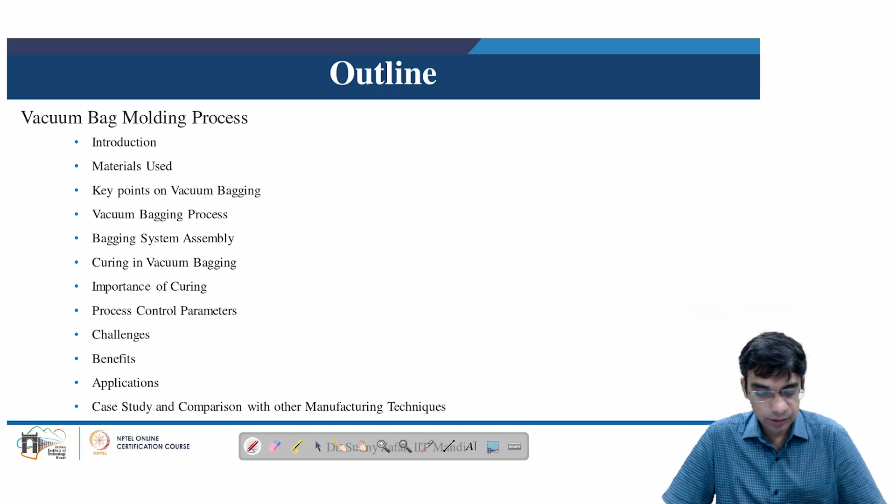Vacuum bagging molding is an open molding process to manufacture the wind turbine blade. We have seen other open molding processes which were the hand layup and spray layup process. The vacuum bag molding process, sometimes also known as the vacuum bagging process, is a process in which the resin - here we are talking specifically of resin meaning thermosets, especially epoxy -

in which the resin to fiber wetting is assisted using vacuum. So the main purpose of the vacuum process is it removes the air which is trapped inside the laminate, thus reducing the defects and improving the strength of the laminate.

Various advantages of the vacuum bag molding method include improvement in strength of the laminates by reducing defects, because by using vacuum there is a very good consolidation of various plies in the laminate. The vacuum bagging process is also low cost compared to other methods such as compression molded laminates, and the density of the laminate in this case is much better compared to compression molded laminates.

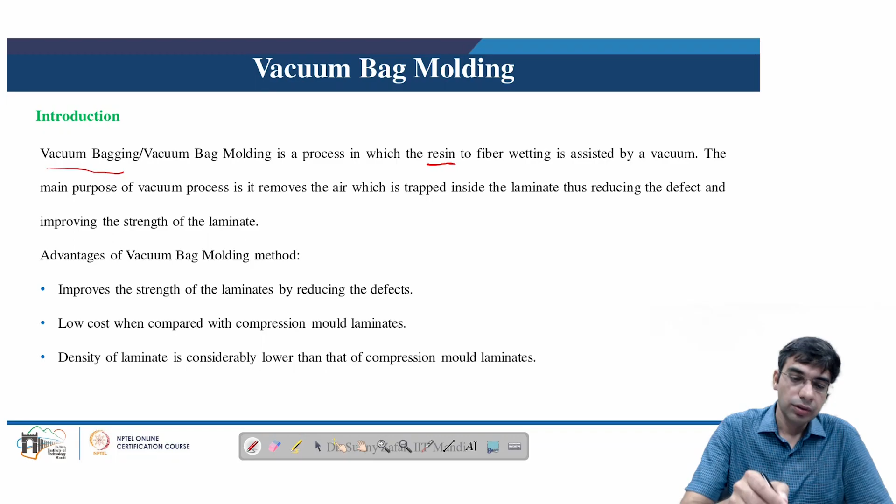The various materials which are used in vacuum bagging for manufacturing the wind turbine blade include various fibers like carbon fiber and glass fiber, resins like epoxy and polyester, and some auxiliary materials are also used in the process of vacuum bagging, which include release agents, peel ply, and bleeder cloth.

We will see some of the key points in the vacuum bagging process. First is the debulking process. If a composite part has few plies, say up to 4, debulking can occur as vacuum is applied during curing. For more number of plies, debulking occurs after every 4 to 6 layers. This repeated vacuuming helps to eliminate trapped air and volatiles, reducing void content and improving the part's structural integrity.

Second point is vacuum application during cure. Applying vacuum during curing not only consolidates the layers but also removes volatiles like residual solvents or absorbed gases. This ensures a lower void content, which is crucial because even a small percentage of voids can significantly weaken the composite.

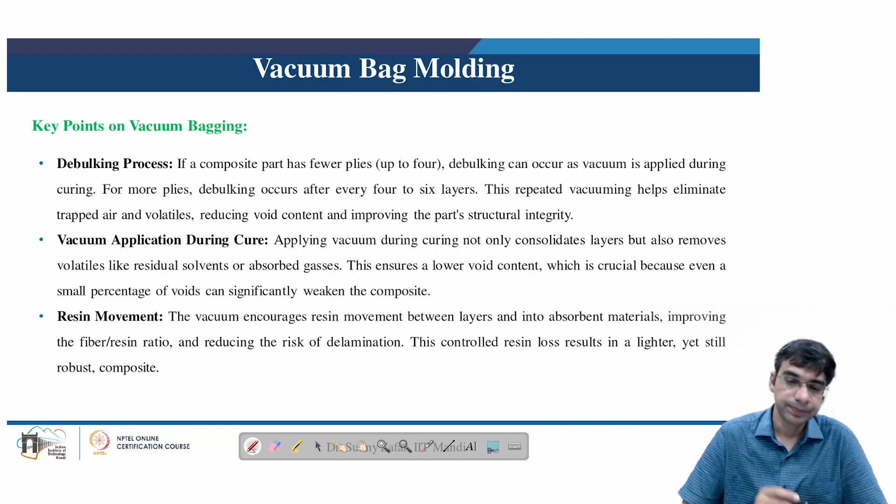We will now understand the steps followed in the vacuum bagging process. Essentially there are 4 steps, of which the first is preparation of materials - this means layup of the fiber reinforcement layer and resin application. As we have seen in structural composites used in wind turbine blades, the composite may consist of several layers of fibers stacked together. This stacking up of layers in various configurations is known as layup.

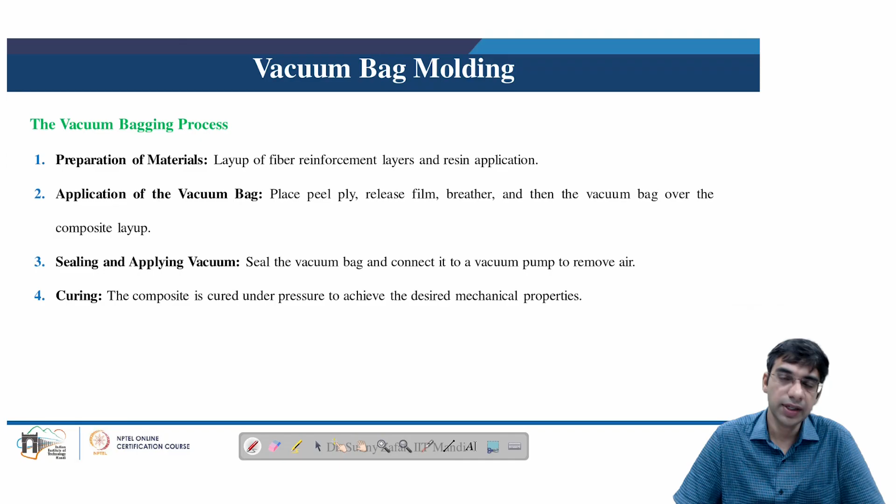The second step in the vacuum bagging setup includes placement of peel ply, release film, breather, and then the vacuum bag over the composite layup. The third step includes sealing and applying vacuum - the vacuum bag is connected to a vacuum pump to remove air. The fourth step is curing: the composite is cured under pressure to achieve the desired mechanical properties. Here the pressure is basically applied by the atmosphere as the vacuum is developed inside the vacuum bag. The atmospheric pressure then helps to consolidate and keep the plies together and removes any entrapped air from the system.

Next, we will see what are the various other auxiliary components used in the vacuum bagging system. So the vacuum bagging system basically involves use of multiple layers and materials.

First is the mold preparation. As vacuum bagging is an open molding process, it is very important to prepare the mold before applying the vacuum bagging system. In this regard, the mold is coated with release spray for easy removal of the part upon successful completion of curing.

Second step includes the layering. Here, the part which has to be built up has various reinforcement layers stacked together in the desired pattern. Third is application of release film or peel ply.

In this layer, often perforated Teflon aids in removing the vacuum bagging system after curing. Fourth is the use of bleeder material, which is applied to absorb excess resin. Common materials used as bleeder material include polyester felt and fiberglass mat.

Fifth is the breather material. Breather material basically helps to distribute vacuum, prevents formation of wrinkles, and must remain porous under pressure.

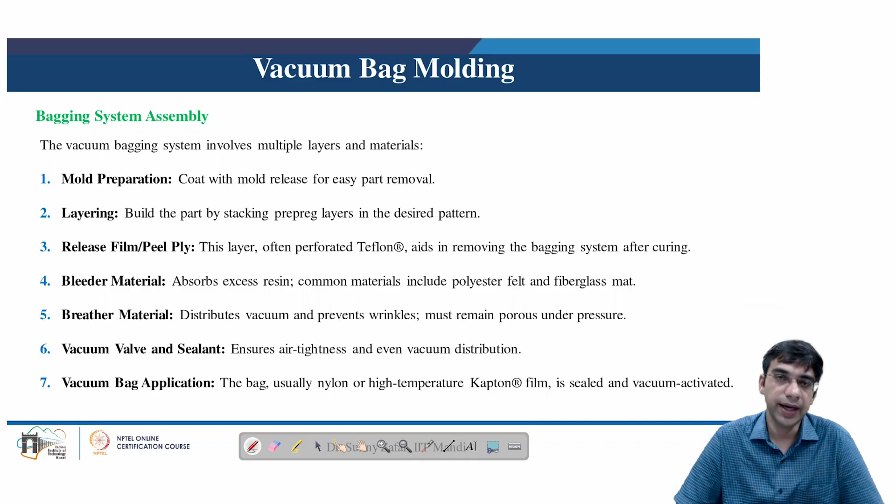We will now see the arrangement of the vacuum bagging molding setup. This arrangement basically consists of many layers, as we have just seen. We will see how these layers are stacked up.

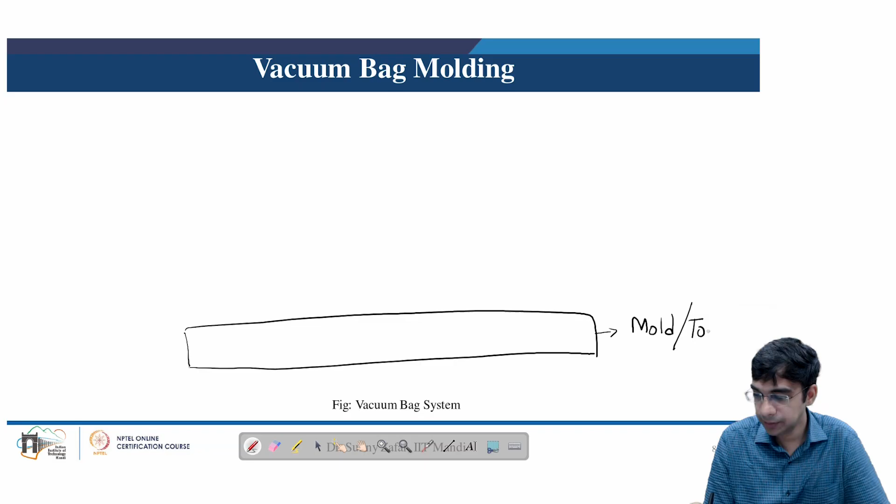Basically it consists of the mold, which is placed at the bottom. This is the mold, or sometimes it is also known as the tooling or the tool, on which the part which has to be cured is placed. Next, we place the various reinforcement layers on top of this mold or tool.

On top of the layer, we apply the release film. So these are basically the fibers, and then we have the release film.

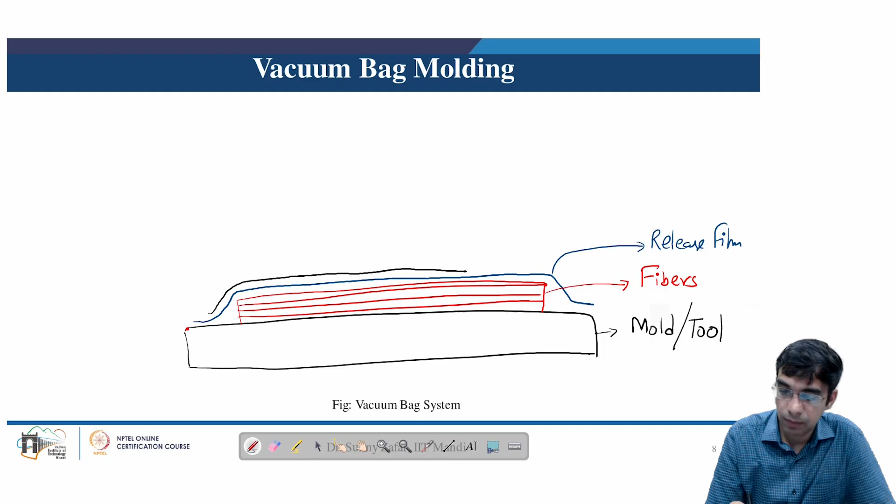On top of the release film, we apply the peel ply. So this is basically the peel ply.

This is followed by applying a bleeder film. This is a thick sort of layer which can absorb excess resin.

Then we have the breather. So this is the bleeder layer, and then here we have the breather, and on top of it is the vacuum bag.

So we can extend this mold. Actually, the mold is slightly oversized always, and at the ends, where the vacuum bag is touching the mold, there is application of a sealant. In the vacuum bag there is a vacuum line going in. This vacuum line is then subsequently connected to the vacuum pump.

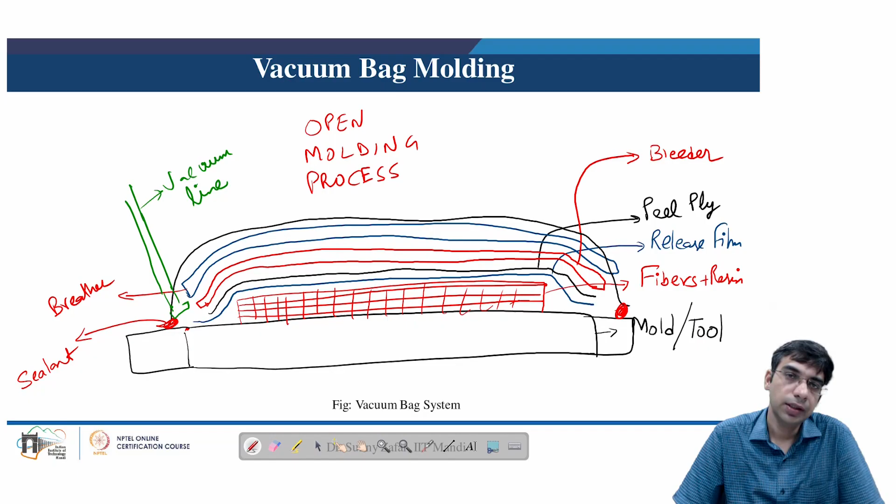So next we see the use of a pressure intensifier and a pleated vacuum bag. In many situations, there may be certain tight corners in the mold wherein the resin may not flow very easily, and because of this there may be some wrinkling on the vacuum bag. This type of situation may lead to development of entrapped air, which may manifest itself in the form of porosity or micropores in the cured part.

So use of a pressure intensifier is done here. This pressure intensifier helps to uniformly distribute the pressure in the tight corner, therefore avoiding any situation of unfilled regions in the composite part. The pleated vacuum bag basically helps to smoothen out any types of wrinkles, as the pleat can open up, and therefore a smooth surface on the cured part is observed.

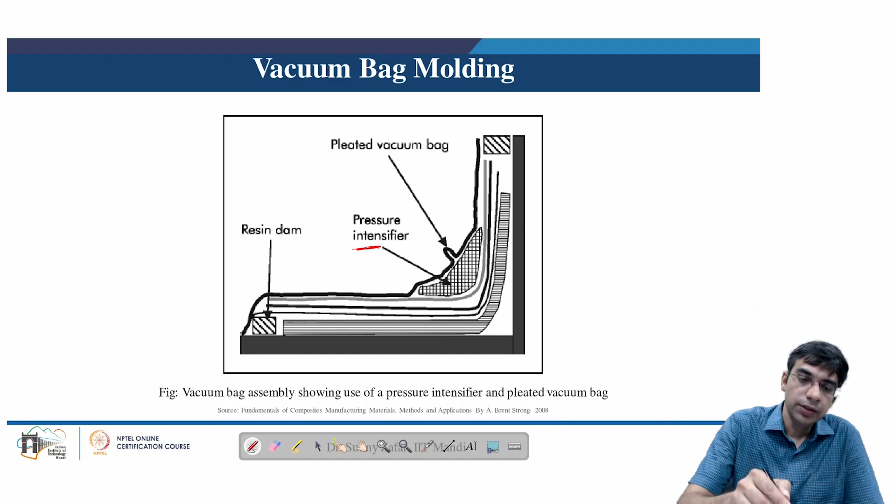Next is basically the curing process in vacuum bagging molding. Curing refers to the chemical reaction, because we are dealing with thermosets, especially epoxy. This curing reaction causes the resin matrix to undergo polymerization or cross-linking, transitioning from a liquid gel into a solid state. The cross-linking helps to lock the reinforcing fibers in place, solidifying the composite and defining its final mechanical properties.

Temperature control is a very important parameter in curing. The curing schedule indicates the time-temperature profiles which are precisely controlled depending on the type of resin used, such as polyester or epoxy. Second is controlled thermal gradients: temperature is increased in controlled steps to increase the possibility of uniform cross-linking, to initiate and sustain the exothermic reaction. Avoiding thermal spikes is crucial to prevent micro-cracking or uneven curing.

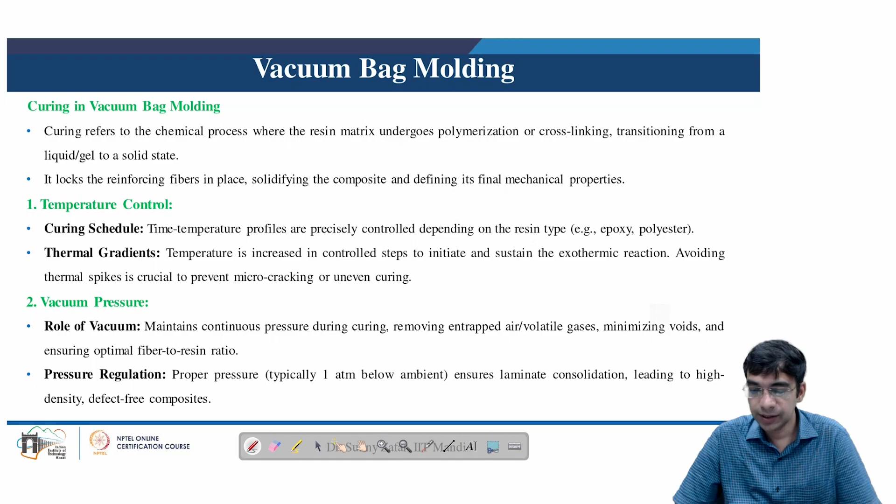Second is the role of vacuum pressure. The role of vacuum pressure is to maintain continuous pressure during curing, removing entrapped air or volatile gases, therefore minimizing voids and ensuring optimal fiber to resin ratio. Pressure regulation is done for proper pressure, usually below 1 atmospheric pressure, to ensure laminate consolidation leading to high density and defect-free composites.

Various heat sources can also be used with the vacuum bagging arrangement to accelerate the cross-linking. Oven curing is popular, where parts are cured in an oven with circulating air to ensure uniform heat distribution. Or an autoclave may be used for high performance composites, as autoclaves are able to apply heat and pressure of the order of 85 to 120 psi to achieve superior fiber compaction and void reduction.

Post curing, some secondary heat treatment may be carried out. This post curing phase raises the temperature to complete the polymerization process, leading to enhanced properties. Post curing improves thermal stability, chemical resistance, and mechanical strength of the composite.

The next phase involves cooling, done at a controlled rate. Gradual cooling is essential to avoid internal stresses which can cause warping or distortion. Stress relief is also important in the cooling phase, because slow cooling prevents residual stresses, ensuring structural integrity and dimensional stability of the part.

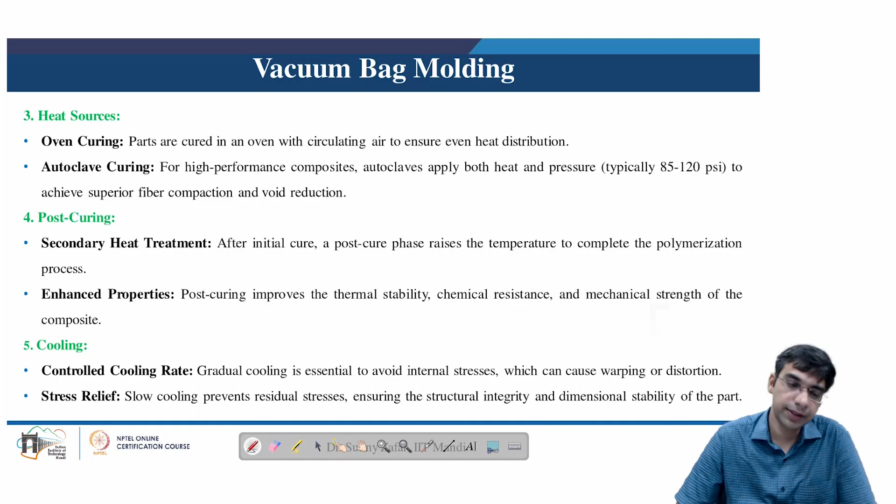Next is the importance of curing, which lies in the final mechanical properties of the composite part. Proper curing is critical to achieve specified tensile strength, modulus, and fatigue resistance, and these properties become much more important for wind turbine blades.

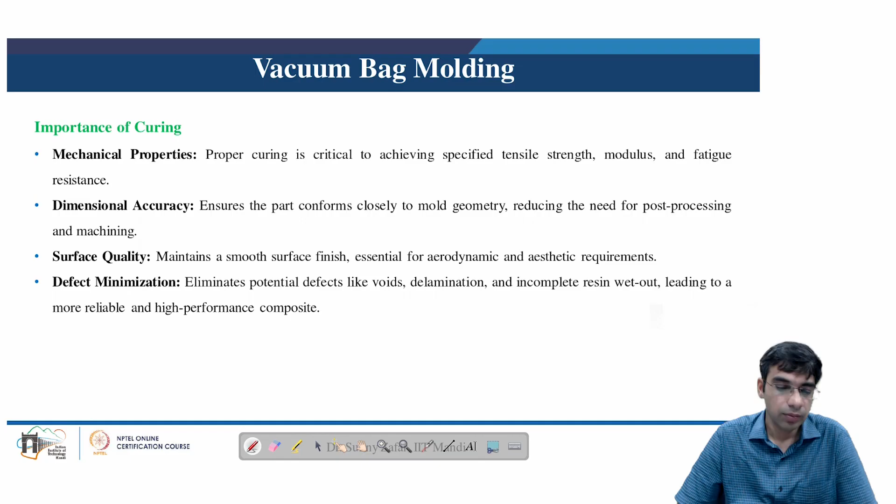Dimensional accuracy ensures the part conforms closely to the mold geometry, meeting the need for reduced post-processing and machining. Surface quality ensures maintenance of a smooth surface finish, essential for aerodynamic and aesthetic requirements. Defect minimization involves elimination of potential voids, delamination, and incomplete resin wet-out, leading to a more reliable, high performance composite.

Other than the arrangement of vacuum bagging as shown in the schematic previously, there are vacuum pumps which are used to create the vacuum inside the vacuum bag molding setup. These pumps may be diaphragm or rotary vane pumps. Vacuum bags, as we have discussed, are typically made up of nylon or polyethylene.

Vacuum bag may also consist of certain pressure sensors and gauges to continuously monitor the in situ pressure during the curing process. Typical process control parameters in vacuum bagging involve a typical pressure range of 0.8 to 1 bar. This affects resin flow and fiber compaction.

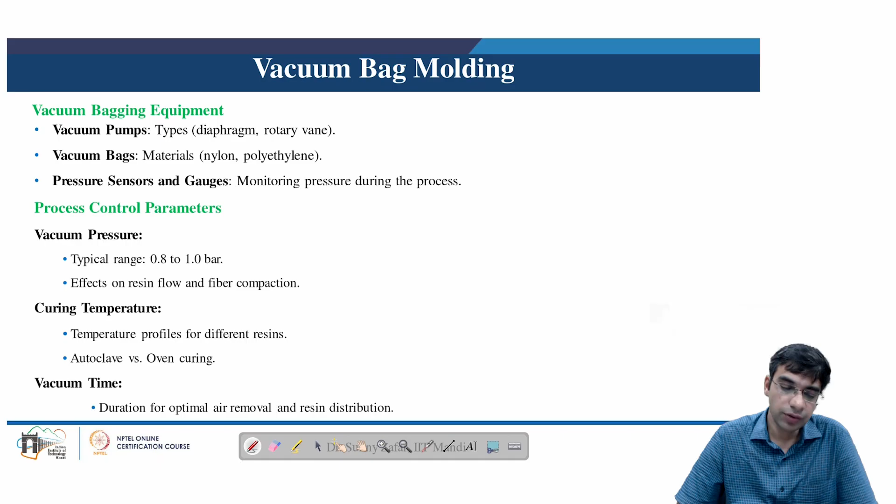Curing temperature can have different types of temperature profiles used for different types of resins, and there is also a trade-off in what temperature is used with oven or autoclave, as both systems act in different ways. Vacuum time is basically the time for which the vacuum is applied, and this ensures optimal air removal and resin distribution.

Various challenges are also there in the vacuum bagging arrangement. There are possibilities of leaks and breakage because of sealant failure, and bag damage may also result, often due to thermal instability and improper handling, and this can ruin the part quality.

Bridging is another challenge, where bagging material may fail to conform to the part surface, leading to insufficient pressure in some areas. Resin flow control, preventing resin starvation and ensuring proper resin movement perpendicular to the fiber, is crucial.

Complex setup requires careful preparation and handling of the material. As we can see, there are several layers used in vacuum bagging, so proper layer setup has to be done. Cost is also a factor, due to the higher initial cost of specialized equipment and materials incurred in vacuum bag molding.

Skilled labor is often required to achieve optimal results, as the labor has to be trained in handling the vacuum bagging arrangement as well as the pumps used in the vacuum bagging system.

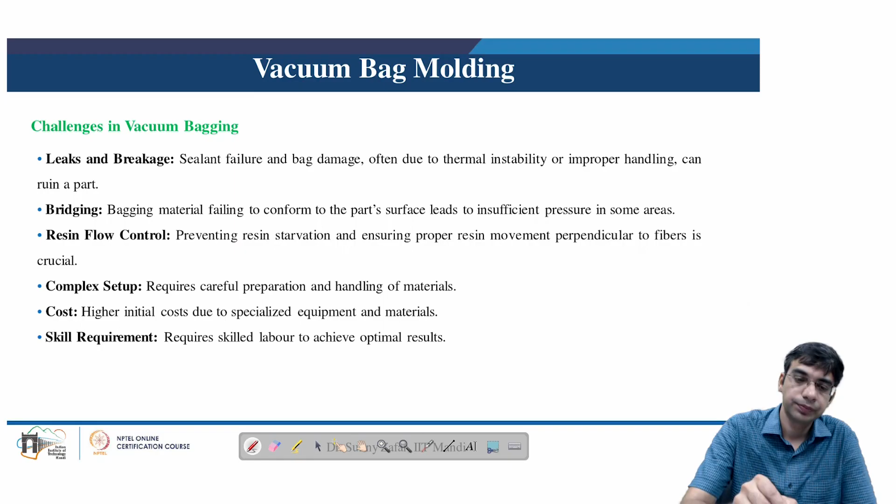However, there are many benefits of vacuum bagging molding. The various benefits involve improved fiber volume fraction, because of which higher strength in the composite can be achieved. Reduced void content: because of the use of vacuum, the void content can be drastically reduced.

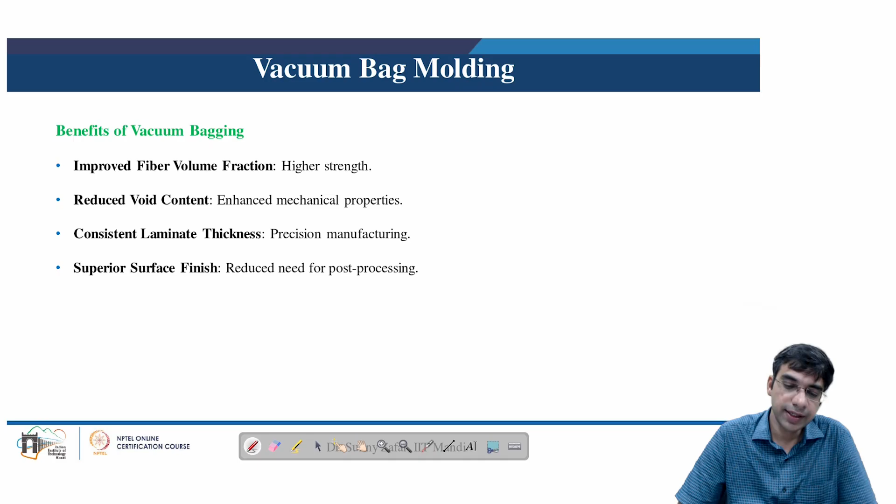Consistent laminate thickness can lead to precision manufacturing. Superior surface finish can also be generated, which reduces any need for post processing.

The vacuum bagging arrangement is also used in other industries, including wind turbine blade components, and the aerospace industry, where aircraft wings and fuselage panels are made, and marine applications where hulls and decks of boats are made using this process. For automotive components, lightweight body panels and chassis components are made using vacuum bag molding, and sports equipment may also be made using this process, including tennis rackets or bicycles.

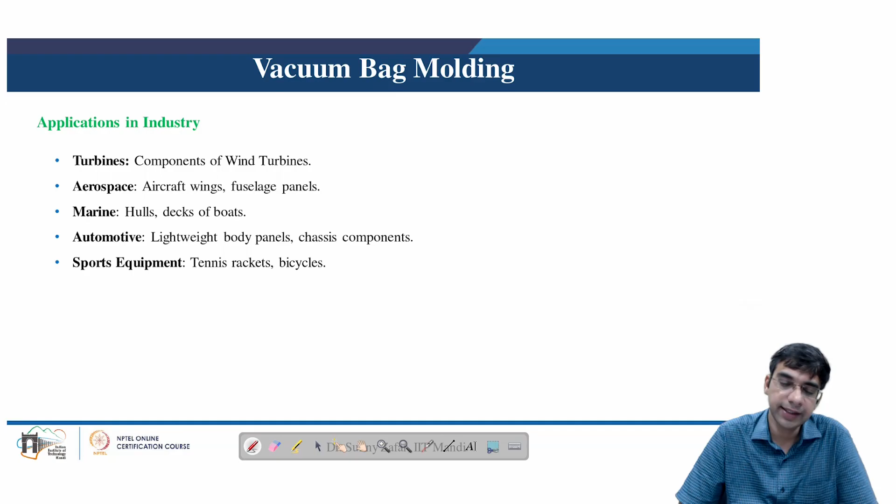In the case study for aerospace components, we can see vacuum bagging being used with a carbon fiber wing section, where the vacuum bagging is done using an autoclave, which has resulted in weight reduction, increased strength and aerodynamic efficiency. When compared to other composite manufacturing techniques like hand layup, hand layup basically provides more simplicity but inferior quality control.

Resin transfer molding has higher automation versus higher tooling cost. And pre-preg processing in autoclave offers advanced quality with higher operational cost.

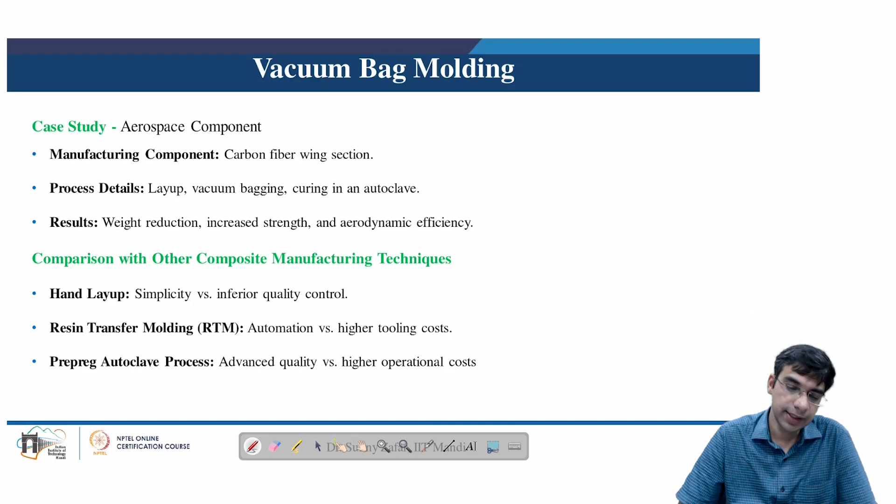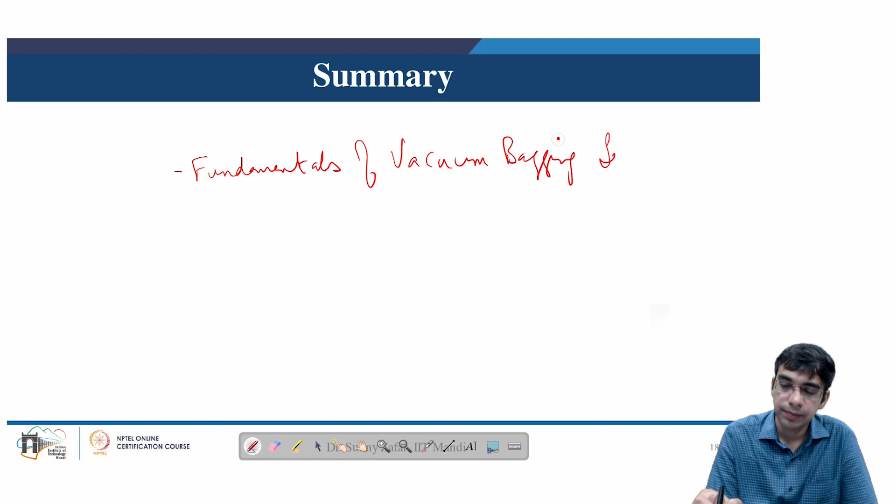With this, we come to the end of this lesson, where we will now summarize what all is covered. Essentially, we have covered the fundamentals of the vacuum bagging arrangement, bagging system. We have looked at the various components in vacuum bagging molding system or molding process.

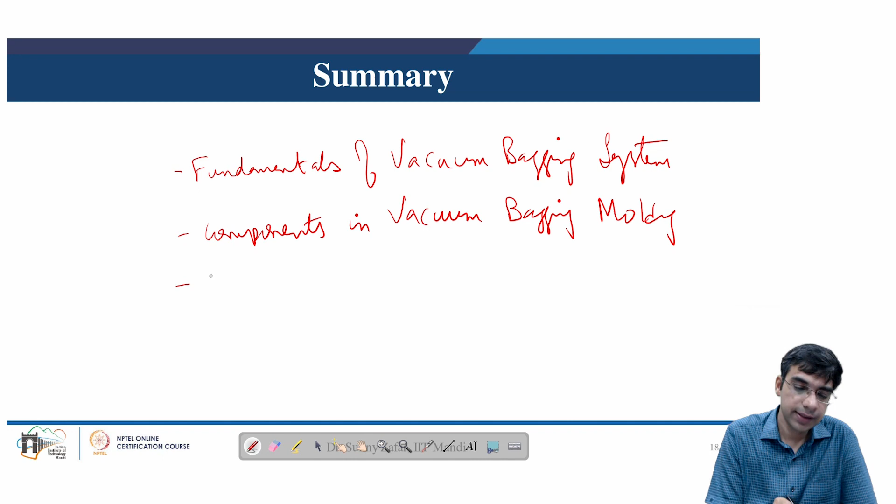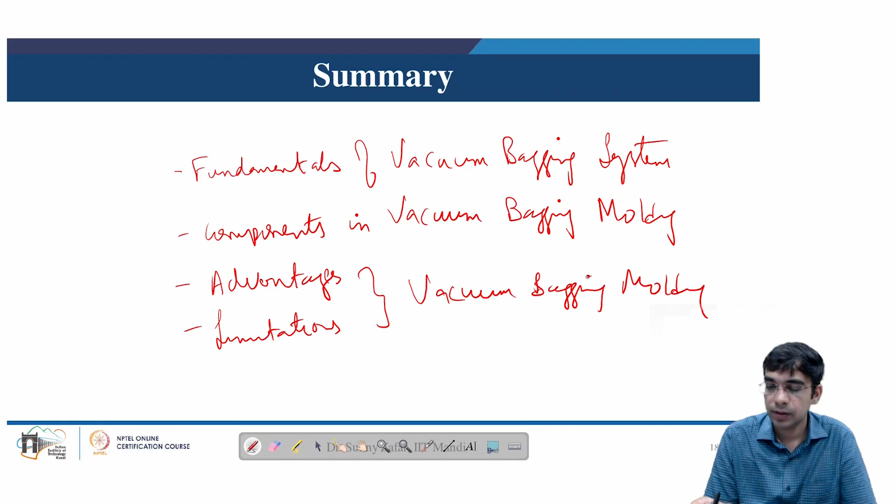We have looked at various advantages and limitations of the vacuum bagging molding process. In the next lesson, we will see the resin infusion technologies, wherein we will focus on the resin transfer molding process, which is widely used to manufacture wind turbine blades. Thank you.